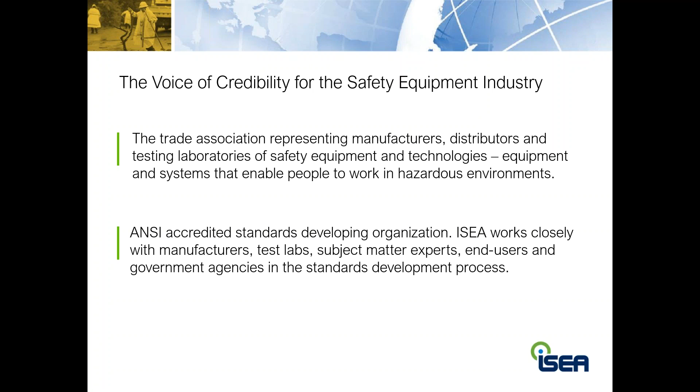In addition, we are an accredited standards developing organization. As such, we are responsible for managing the standards process for key PPE standards to include the development, revision, and interpretation of those industry standards. ANSI itself does not write standards. They empower organizations to work under a prescribed set of development rules, and those are the rules that we adhere to.

As noted, as an accredited standards organization, you're probably familiar with some of the more widely known documents that we write, including eye and face protection or first aid kits. Many of the standards that ISEA writes are codified into regulation. They may be referenced into other industry standards or are recognized as best practices when designing programs to help workers.

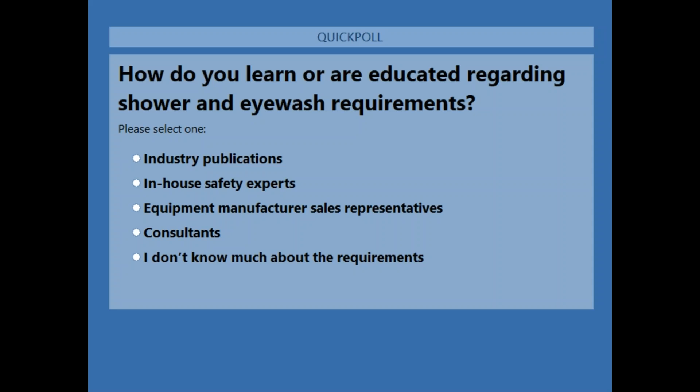Okay, these are the poll results. In-house safety experts. So I know many of you are, I believe, the environmental health and safety directors or associated with that department at your institution. So that's wonderful. Glad to have you on board today. And industry publications and equipment representatives. And then we have some people that are here maybe to take a deeper dive into the eye wash and shower requirements. So great. We hope that you'll be satisfied with the information you received today.

So, yeah, oops. This is not working well for me. Oh, there we go. Great. All right. Sorry about the delay there, everyone.

Okay. So basically, we have some statistics from the Bureau of Labor Statistics, which is the federal government. In 2014, there were over 13,000 chemical exposures in the workplace in the United States, and over 46,000 workers were exposed to harmful substances or environments. Over 23,000 workers suffered eye injuries, and the direct and indirect cost of these workplace injuries was $39,000. And even more sobering, if you want to get a bigger picture of this, is the fatalities in the workplace. In 2016, there were over 5,000 fatalities due to work-related injuries in the United States.

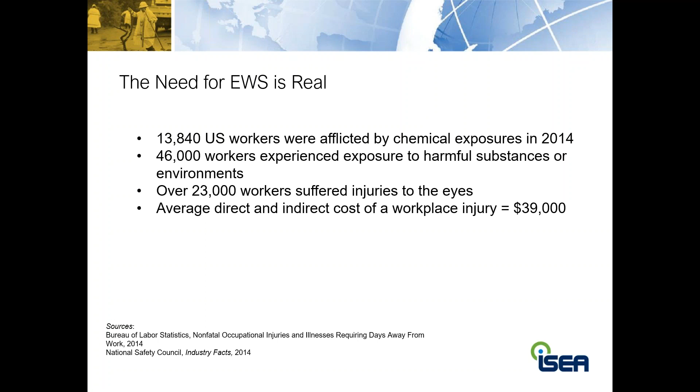And some places where you will find emergency eye wash and showers, or we should find them, is in machining shops, for example, manufacturing, chemical storage and/or chemical manufacturing, petrochemical. Also, more routinely, in custodial closets, janitor's closets, where not only cleaning fluids are stored, but they're stored in concentrated levels and then diluted in that storage facility. And so that presents a greater risk to those who are involved with those chemicals.

In the laundry facilities, bleaches are used, and bleach is corrosive. Then also in laboratories, your science labs, your places of learning, the science classrooms, pharmaceutical manufacturing, pharmaceutical research, etc. Many, many different applications.

So in 1970, the Occupational Safety and Health Administration was formed by the federal government, and pertaining to our topic today, there's a statement in there, very broad and general: where the eyes or body of any person may be exposed to injurious corrosive materials, suitable facilities for quick drenching or flushing of the eyes and body shall be provided within the work area for immediate emergency use. So this was a very general statement, and basically left the door open for a standard, and we'll give you more information about the standard that was formed later on.

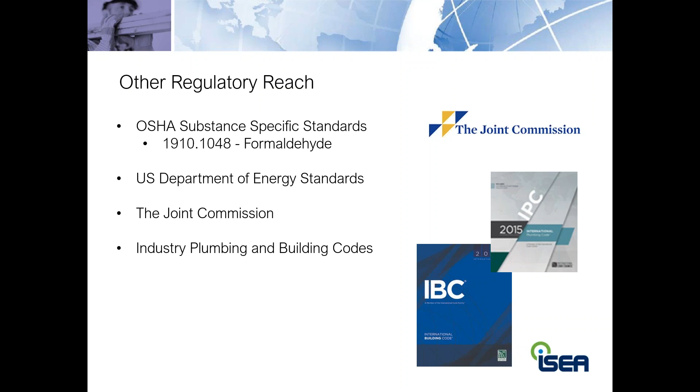And for new facilities on your campuses that are plan checked and permitted, they need to go through the scrutiny of your state and local building codes. The two main plumbing codes in the United States are the International Plumbing Code and the Uniform Plumbing Code, and both codes require adherence to ANSI Z358.1, so it's through that channel, building codes, that there's enforcement of the standard.

So the most current version of the ANSI standard, there's been several versions over the years. The first version was 1981, and currently 2014 is the current standard.

So another poll question: is the ANSI ISEA Z358.1 a federal OSHA regulation? Please respond.

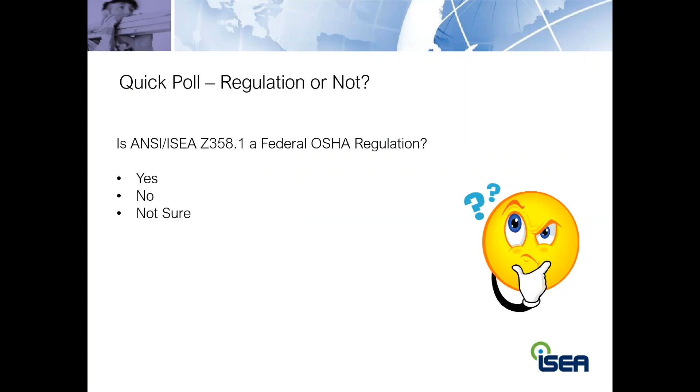So that's how the standard is enforced, but it is not enforced by federal OSHA, which was the question. But it is referenced in some of their documentation and correspondence, as it states here. Industry consensus standard approved by ANSI, developed by a recognized industry organization, ISEA, and Christine explained who the ISEA is, and input from stakeholder companies and organizations such as universities.

So perhaps your university, if you choose to want to be involved in helping us formulate the standard, then please contact Christine. Routinely updated. Right now, in the last decade or so, a couple decades, I think it's been a 5-year update cycle. Recognized by multiple state occupational safety and health. I mentioned that earlier. There's some new states, for example.

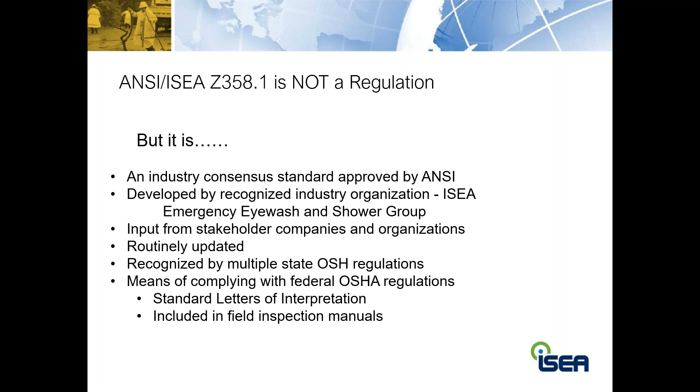Means of complying with federal OSHA regulations. And again, getting back to federal OSHA, it does reference the standard in their interpretations, but officially in the Code of Federal Regulations, the ANSI standard is not cited to be for compliance.

So equipment types addressed in the ANSI standard, Z358.1-2014: emergency showers, emergency eyewashes, emergency eye/face wash equipment. Ryan will explain the differences between the two in more detail. Combination units being the combination shower and eyewash or eye/face wash.

Supplemental equipment, which by definition doesn't give the full gallons per minute, full flow, or even the 15-minute required time for washing. But they are available for basically point of use, such as personal wash units and drench hoses. Personal wash units would be squeeze bottles, drench hoses with one nozzle on it. And Ryan will get more into that here shortly.

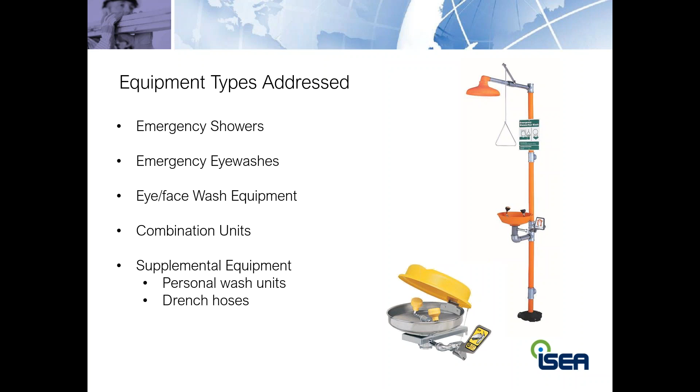Key areas addressed in the standard: flow rates and duration, patterns, the spray patterns of the showers, of the eyewash heads, the valve operation is prescribed also in the standard. Product certification, this is third-party certification done by a third-party laboratory that certifies each manufacturer's product to make sure that it is performing per the ANSI standard and to meet all of these state OSHA requirements and the building codes in the states.

Installation instructions, installation actually is addressed in the standard, and maintenance and training. And also, I know many of the universities require commissioning by the installers to test the eyewash and/or shower to make sure that they meet the ANSI standard before turning the facility over to you.

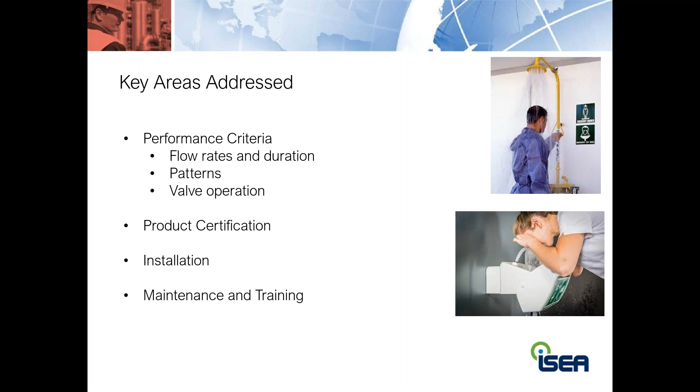So the first performance criteria that I'll address, and then Ryan will pick up the others, is the 15-minute continuous flushing, due to medical evidence that residual chemicals on the body require extended flushing to ensure the removal. And for some, I know they feel this is a long period of time, and it is in that situation, particularly the eyes.

However, in my experience meeting with medical professionals, in one instance, an urgent care nurse said that the most common time that they flush people's eyes when they get to urgent care is 30 minutes. I think that's indicative of the fact that they weren't able to receive first aid at the site, and there was not an eyewash available.

And in another situation, at the University of Washington, the professor of toxicology for the state of Washington, Tom Martin, stated that they will irrigate patients' eyes up to 24 hours because the cornea can be transplanted, but the retina cannot be. And so in those situations when eye loss may be imminent, they will try to irrigate for 24 hours to save the eyesight.

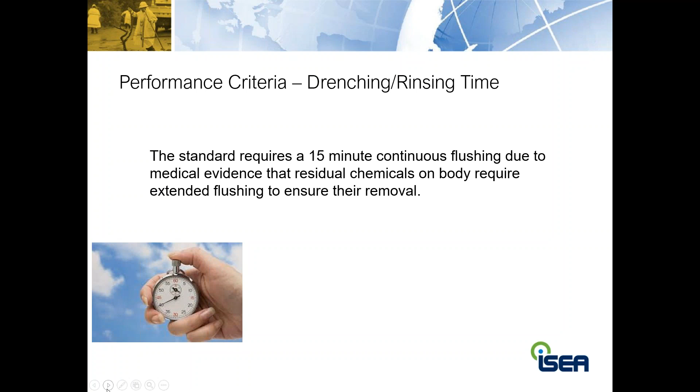Okay, I think this is where I'm going to jump in, and I'm going to continue our review of the ANSI Z358.1 standard and really start to look at more of the specific performance requirements that are within the standard, and then some of the requirements for facility owners, because the standard really is intended to address both of those areas. What are the performance requirements that a manufacturer may need to provide products to, and then what are the expectations of the facility owner when that is installed.

So the first thing that we're going to look at is the flow rates, and the flow rates will vary depending upon the type of equipment that you're installing. It's also important to note that these are minimum flow rates, so this is the least amount of water that you can expect to come out of the product and still be compliant. A lot of times what you'll find with plumbed units is you will be a little bit more than that, so they're not just on the edge of that threshold.

If you're irrigating the eyes, if the product is simply being used as an eye wash only, the minimum flow rate is 0.4 gallons per minute. If you're irrigating the entire face with drenching water, the minimum flow rate is going to be 3 gallons per minute. And then if it's a body wash or a drench shower, the minimum flow rate is 20 gallons a minute. All of these are considered or tested at 30 pounds of pressure on the inlet of the fixture.

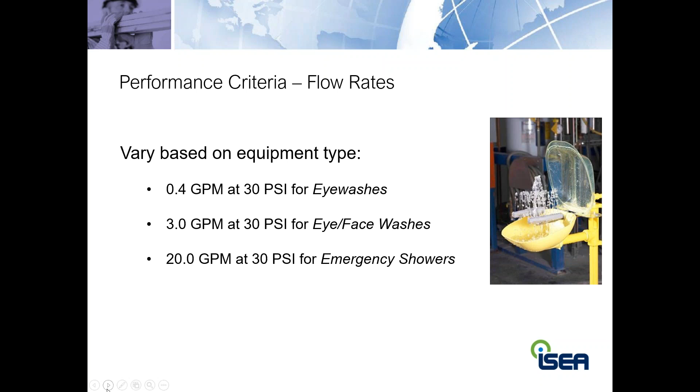The standard also talks about spray patterns, and this will cover spray patterns for drench showers and spray patterns for eye face wash. In regards to an emergency shower, the spray pattern or the flushing fluid must be at least 20 inches wide at 60 inches above the finished floor. The standard also states that the drench pattern must be substantially dispersed throughout that cone or that spray pattern that's coming off of that shower head there.

And this is written that way to try to effectively wash the user during an event. So you want to cover as much of that user as possible so that they can quickly and efficiently rinse those chemicals or other agents off of the body. And as I mentioned, for a combination unit, this has to be achieved with both the drench shower and the eye face wash going at the same time, so that pattern needs to be present for a combination unit when both are going at the same time.

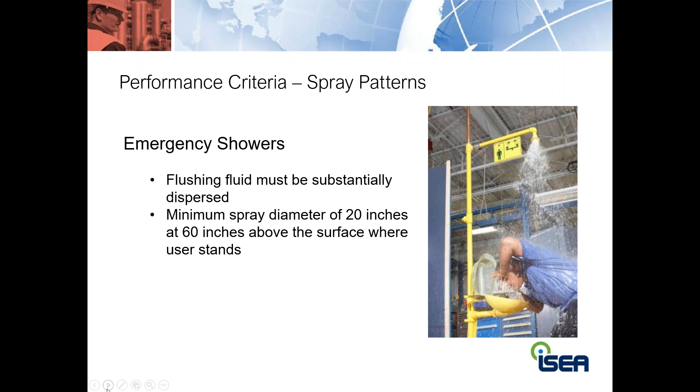In regards to an eye or an eye face wash, we actually have a test gauge that's been developed. And this is a tool that manufacturers use when developing products, certifying bodies will use when certifying products, and then of course facilities can use when they're testing their products that are already installed. So what you have is a little rectangular gauge, and it has two circles in the center, and those represent the average eyes of a human being.

And so then the gauge is placed in the water streams to ensure that you're actually covering the eyes in the right or proper manner. So when that test gauge is placed in the water streams, the water must cover both of the circles at some point that is less than 8 inches from the bottom or the nozzles that are supplying the eye wash fluid.

And when tested in a combination unit, this should also be done when the drench shower is running at the same time. So you don't have a situation where the drench shower is starving all the water and you don't get anything from the eye wash in that circumstance. And then all of the spray pattern heights, again, are measured from the floor. And so for an eye wash, it needs to be between 33 and 53 inches from the floor.

Now, these gauges are readily available. I know all of the manufacturers have these available. So if you are in need of one, you can contact any of the manufacturers of this safety equipment, and they will be able to provide these test gauges to you so you can continuously inspect your products that are in your facilities.

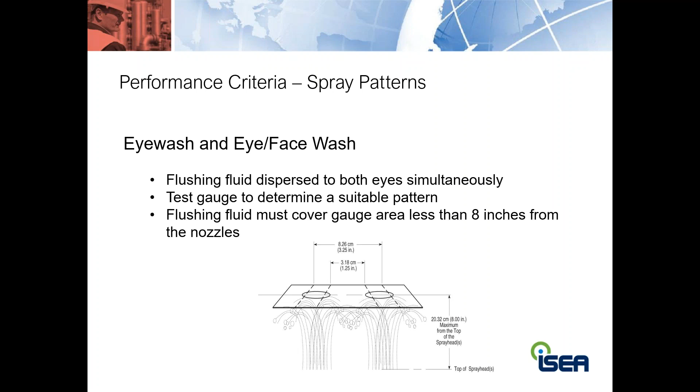The standard also talks about the temperature of the water. And so just as important as the spray patterns and the flow rates, temperature of the water has also been deemed to be an important requirement. When the standard was first developed, it wasn't in there, but it was soon recognized as the association talked about how we can improve the standard, that the temperature of the water has a great influence on how long someone actually stays in the flushing fluid.

So it was eventually put into the appendix of the standard, and then eventually after more discussion, moved to the main body of the standard. So it's an enforceable component of the Z358.1 standard now. And I want to give you a little background on this. You can imagine if you're going back to that shower situation in your home, I don't know how many of you feel comfortable showering in 50-degree water for 15 minutes. I'm guessing that not many of you do. So I doubt you would want to stay in there for that period of time.

And now consider that the majority of the U.S. groundwater is somewhere between 40 and 60 degrees. Unless you live in really warm states like Arizona or Florida or Texas, you're probably getting your groundwater at a temperature that's less than 60 degrees. So if our goal is to ensure that a person stays in that water for 15 minutes, it's important that that temperature be conducive to allow them to do that. And so that's really what led to the tepid water requirement. And in the standard, the tepid water range is defined as 60 to 100 degrees Fahrenheit.

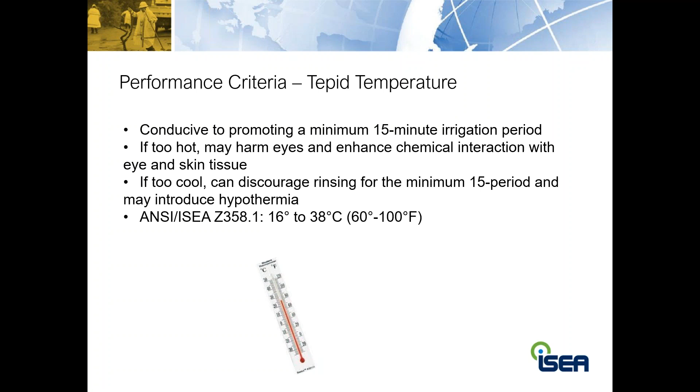On the other side of the range, water over 100 degrees could of course become scalding, but also importantly, some chemicals will react in an enhanced manner when flushed with water over 100 degrees. So you don't want to make that problem worse as well. So you really need to be somewhere within that range of 60 to 100 degrees. If you are in a warm weather state and your water is stored at a temperature above 100 degrees, you will need to consider some sort of a chiller option to actually cool it down. Okay.

Now, there are a lot of different methods out there to achieve tepid water. The standard doesn't dictate which method you use, so it's entirely up to each facility how they want to deliver that tepid water. But I'm going to go over a few of the more common solutions so you get an idea of what these would be. So the first one is a thermostatic mixing valve, and that's a device that's going to make use of the hot water supply and the cold water supply available in the building. It'll blend those two temperatures to a consistent tepid water temperature, and it'll hold that temperature constant even if the incoming temperatures or pressures change at the valve.

The valves are sized based on the application, so a smaller device will be suitable for an eyewash, a medium-sized device for a drench shower, and a larger valve for a full combination unit. There is a standard that governs thermostatic valves for emergency applications, and that standard is ASSE 1071.

A big part of that standard is a provision to provide cold water when the hot water runs out. So the idea there is that cold water is better than no water at all. So if there is an instance where your hot water supply were to run short, or someone were to accidentally cut off the supply of hot water to the mixing valve, cold water still continues to flow through that valve at all times.

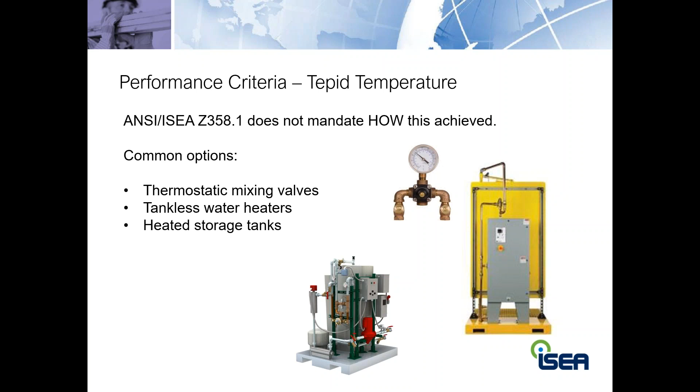And then the last type of method you could use is just a heated storage tank. So in this case, you have a large vessel that can hold sufficient water for the full 15-minute requirement of the standard, and that water is typically heated to a tepid water temperature with some sort of an immersion heater, and then when called upon, the water is just delivered directly to the eyewash or drench shower from that tank.

The standard also talks about performance criteria as it pertains to valves, and it actually does this specifically for valves that are on the fixture, but also talks about any valves leading up to the fixture as well. And so I'm going to touch on both of those.

So first of all, any valves that are on an eyewash or a drench shower need to be very simple to operate. So it can't be a complex, multiple motion type of situation to turn on an eyewash or a drench shower. The activation must occur in 1 second or less. So as soon as you activate, pull a handle or a push rod or anything like that, the water should come on in 1 second or less.

Once you activate the unit, it must stay open by itself. So it should not be one of those spring-loaded devices where it automatically turns itself off. And this is so that you have the ability to hold your eyes open. So if you need to irrigate your eyes, the standard wants you to be able to have two hands free to hold your eyelids open and flush the contaminants out.

Similarly, if you get some sort of chemical agent on your clothing, it could be soaking through and eventually being absorbed into the skin. And so you have to have two hands available to remove any articles of clothing that may be contaminated by the hazard as well. So it is important to have that product stay open once it's been activated.

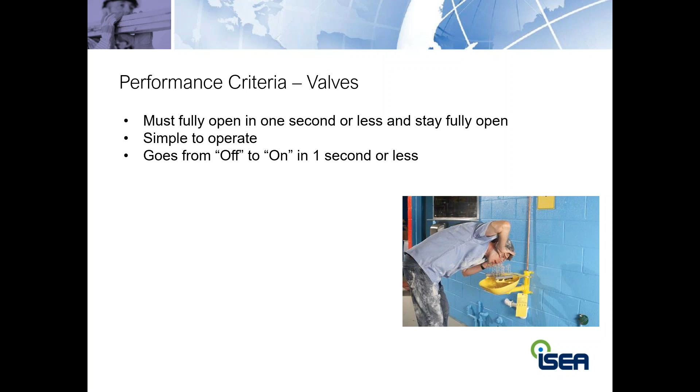Okay. The standard also talks about certification, and so as a manufacturer, they're going to obtain a third-party certification on all of these products. And in this way, it's not the manufacturer that's saying, yeah, of course, my product complies with the standard. It's actually an independent agency that has done a full evaluation of the product per the ANSI Z358.1 standard and made sure that it actually meets all of the criteria therein.

And so that performance evaluation is going to look at all those things we talked about. It's going to look at the flow rate. It's going to look at the flushing fluid pattern. It's going to look at the activation and any other manufacturer performance criteria in the standard. And it's going to then provide a verification that, yes, this passes that requirement.

So I always encourage then that you ensure that the product you're purchasing has that third-party certification. Some of the common ones that you will find on products are CSA, SEI, which is Safety Equipment Institute, UL, or IAPMO. So any of those are some of the more common ones you'll find that certify products.

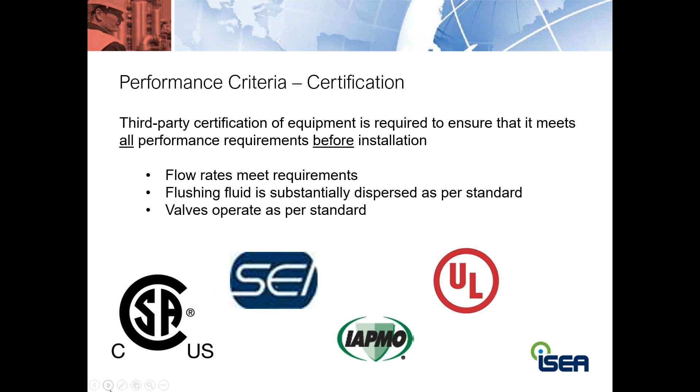Now, supplemental equipment is also touched on in the standard. Supplemental equipment could be those personal wash units, or it could be drench hoses. These devices would support compliant products, but it would not replace the need for these products. So bottled eye wash is a good example of this.

Bottled eye wash is a great device to provide an immediate relief if you get some sort of contaminant in your eyes, but they're not large enough to provide a full 15-minute rinse. They don't support a hands-free operation, and you can really only rinse one eye at a time with these. So it does not replace the need for a fully compliant eye wash product.

Supplemental drench hoses are also a device that can be considered, as they can allow you to target a specific area of the body. But again, these devices won't be able to encourage a full hands-free operation, and they can't drench the entire body like a drench shower would. So these products can supplement the use, but will not replace the need for a full 15-minute compliant product.

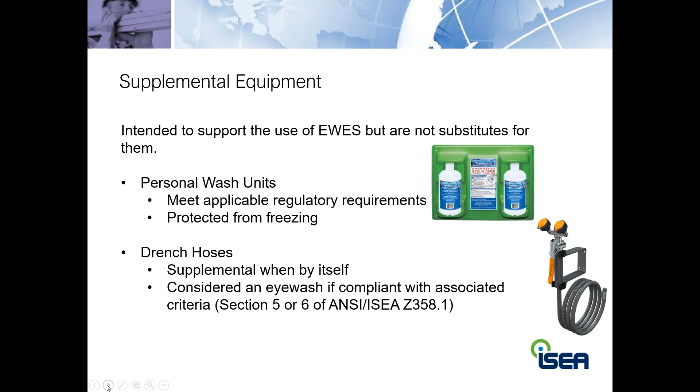The standard then gets into some of the requirements of an installer, and so I'm going to cover some of those next. The first is the installation or the placement of the equipment. So in this case, most manufacturers will provide guidance in their installation instructions on these factors, but it is important to understand as the facility owner what you need to follow in placing this equipment.

So drench shower heads must be between 82 and 96 inches off the finished floor, and those eye wash streams need to be between 33 and 53 inches off of the finished floor. So be cognizant of this when you're placing products onto walls or into ceilings or onto countertops that you're hitting these

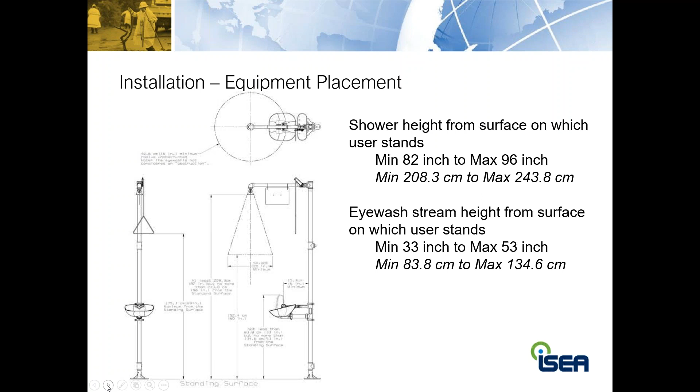requirements of the standard. Anytime you have a combination unit or a pedestal or floor mounted unit, the manufacturer probably has these built into the design, but if not, you need to pay attention to those so that the unit's not too high up into the ceiling or too high up on a counter or a wall.

You also need to be aware of the surroundings. So the flushing fluid that's delivered to the eye wash, first and foremost, needs to be potable. So it needs to be from a suitable for drinking source. The safety equipment needs to be close to the hazard. So basically 10 seconds is what the standard requires in terms of a distance from the hazard, which equates to about 55 feet.

That's the reasonable distance an average person can cover in 10 seconds. It needs to be in a well-lit area. There needs to be visible signage to identify the equipment, and it needs to be located on the same level. So you can't have to go up and down a set of stairs in order to get from where the hazard is to where the safety equipment is.

Also be aware of any obstructions that are on the way, like boxes or garbage cans or things like that, because you don't need to have a person try to clear those boxes or things out of the way before they can actually get to the safety equipment. You also don't want to have the employee run a maze to get there, and they should not have to go through a doorway either.

Now, I am going to point out a couple of things from the appendix of the standard to be aware of. In the appendix, it does allow a single step up from the floor onto a platform or an enclosed safety fixture device. And it also allows for a doorway if the door opens in the direction of travel. So you can't have to pull the door towards you. It should push or move in the direction of travel, going with you.

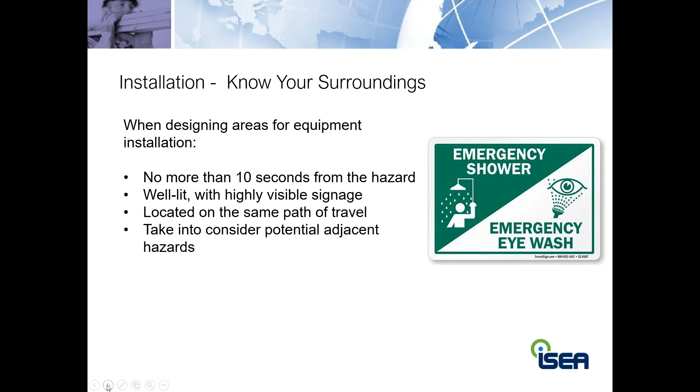The standard then gets into some maintenance and training elements as well. So first and foremost, always make sure you follow any maintenance or inspection requirements that are provided from the manufacturer. So please do read those installation instructions. The standard requires that all plumbed eyewash and drench showers are activated weekly. This is done to flush the line from any debris or sediment that's building up in the dead leg. So you're really trying to flush out the dead leg portion of the device.

It's not intended for you to have to run the unit for a full 15 minutes. It is just a shorter test. So you're ensuring functionality and clearing those lines. You should also document any of this testing for record keeping. And inspection tags are provided with safety fixtures for this purpose. And that way you have a record that the product has been tested on a weekly basis should anyone need to see that.

Now, self-contained products are to be inspected visually instead of actually activated. They can just have a visual inspection, but always refer to any special manufacturer's instructions that may come with that, so you are following that properly.

Another important thing to be aware of is employees need to be properly trained on this equipment. They need to know where the product is located, how the product is used. So you should actually walk through that process. Here's what you would do to get to the product. Here's what you would do to activate the product, and then reinforce this on a regular basis.

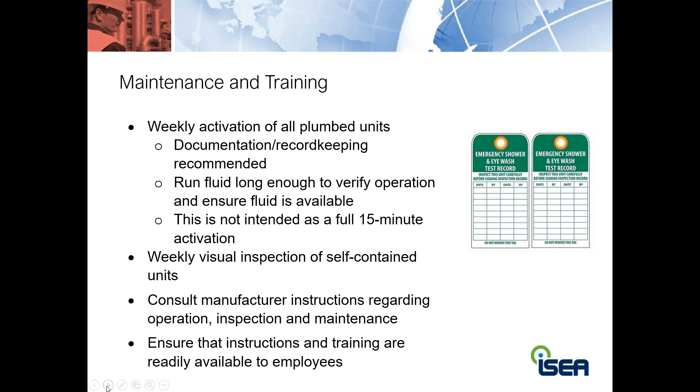There is an annual inspection that's required in the standard, and this is a more full evaluation of the product to make sure that it complies with all elements of the standard and it's going to deliver water for that 15 minutes. At this time, it's also a good idea to look carefully for any changes in the work environment that may impact the safety equipment as well. And then just make sure that this product is still meeting the needs of the hazard that's present in the work area.

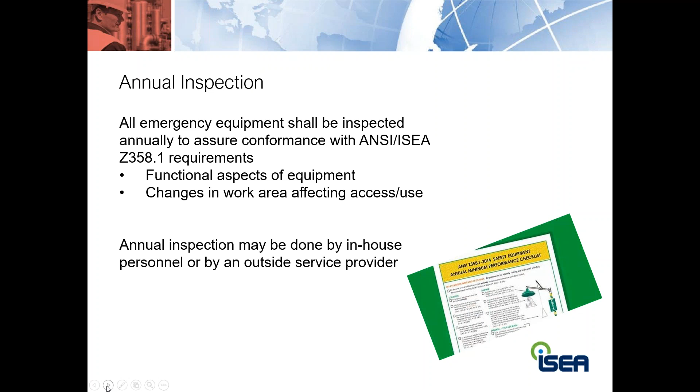And then I'm going to cover a few things that are not really addressed in the standard, so you're aware of these as well. So the standard doesn't tell you exactly which equipment you need for the hazard. You really want to review a safety data sheet to help direct you with that. So those types of documents will tell you, based upon this chemical hazard, you need to flush your eyes thoroughly for 15 minutes, or you need to rinse your body thoroughly for 15 minutes if exposed to the skin or the eyes.

So look for that type of help when trying to determine what type of equipment you need. The standard also doesn't cover drainage of the water or containment of the water. So be aware that the facility needs to try to collect or drain this water as it's been dispersed from the eyewash or the drench shower.

And that combination unit, again, is going to flow 23 gallons a minute for 15 minutes. You're talking about 350 gallons of water for a full 15-minute period of time. So do think about where that water is going to go, how it's going to be drained, if it needs to be contained because the contaminant is so harsh that you can't reintroduce it into a gray water or a groundwater system. So that's really going to be dependent on site and any local environmental protection agencies that may have some

jurisdiction in that regard. Also be aware that alarms or signaling systems are not required by the standard, but it is a good thing to consider as well. Alarms are important in remote locations of the facility, outdoor operations where there's not a lot of other people present, or in situations where vandalism might be a concern. So an alarm is a good way to send a notification to anybody in the area or remotely, because they can be tied into a building management system, that an event is occurring and they need to get help there as soon as possible.

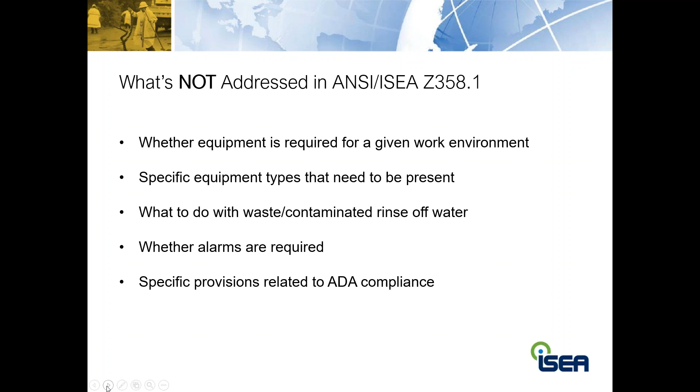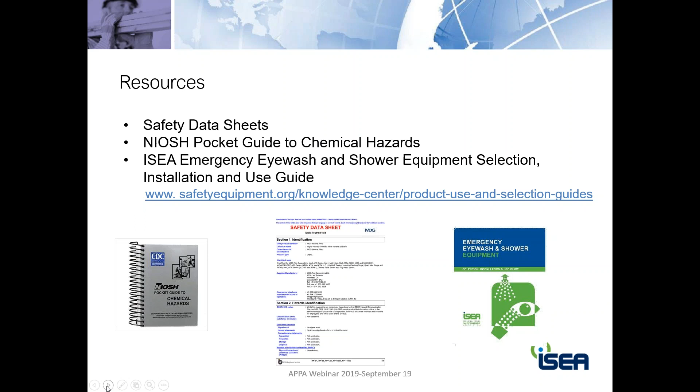And then lastly, there are a few other resources out there that you can look at beyond just the ANSI standard that we talked about today. Safety data sheets would be one element that you can reference in terms of what chemicals are in your hazard and how you need to protect or treat employees that are exposed to those chemicals. You can consult the NIOSH Pocket Guide to Chemical Hazards, which has a wealth of information on that as well. And then lastly, ISEA has a use and selection guide on their website. The guide goes into a lot of details on the types of products and important things to know when selecting eyewash or drench showers for your facilities.

So with that, we can turn it over to any questions that you may have, and we'll do our best to try to answer them between Mike and myself. Okay, our first question for our presenters: are these plumbed into standard cold water?

You would not necessarily want to plumb them just into straight cold water. You would want to make sure that the water is tepid. Okay, so that's the distinction I'm going to make. If your supply of water can remain tepid in that 60 to 100 degree range for 15 minutes, then you don't necessarily need to have another device to support that. But if not, then do look at one of those other solutions out there that can provide that tepid water.

You have anything to add, Mike? Go ahead, Mike. That was Ryan. Okay. You want me to make a response? You have anything to add?

As Ryan mentioned earlier, 60 degrees is awfully cool for a 15-minute period. Even in Southern California, we have facilities that have tempering systems because the owner wants to maintain an 80-degree temperature throughout the whole system to provide water to the eyewash and showers. So it depends on what EH&S dictates and what the optimal temperature should be. We need to stay within that 60 to 100 range, but it may require a different temperature at your facility, and that can be achieved through the means that Ryan already discussed.